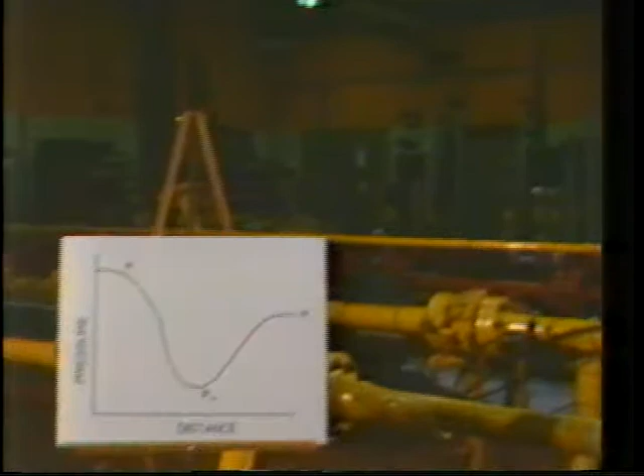Consider a simple restriction, such as an orifice plate in a pipe. Liquid passes through the restriction. Various forms of energy are exchanged in such a way that the mean pressure of the liquid decreases to some minimum value, usually referred to as the vena contracta pressure. As the fluid moves into the downstream pipe section, the pressure again increases, but is not fully restored to the value it had at the inlet.

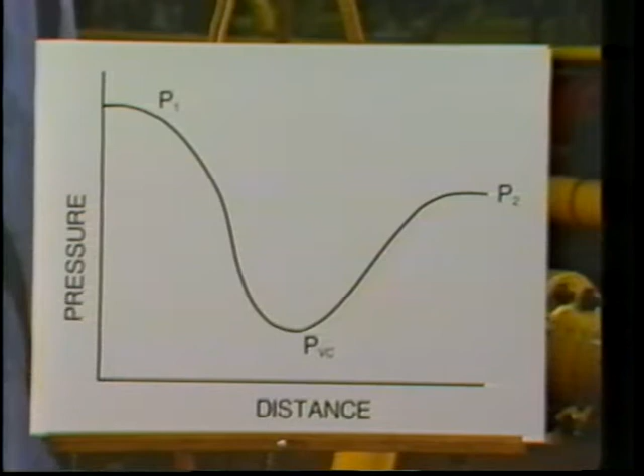This is because some of the energy was irreversibly lost through fluid friction. The key pressure is the vena contracta pressure. As long as this pressure is sufficiently high, the flow is free of cavitation.

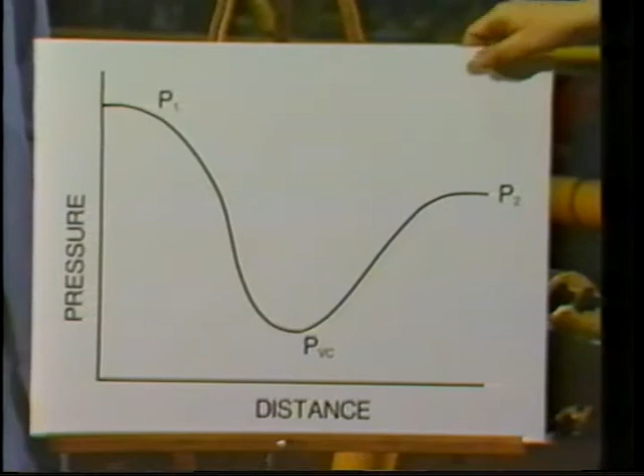If, however, this pressure should drop below the vapor pressure of the liquid, it becomes thermodynamically unstable and partially vaporizes. If, on pressure recovery, the local pressure rises above the vapor pressure, the vapor is again thermodynamically unstable and rapidly reverts to a liquid. This is the cavitation process.

Should the local pressure not recover sufficiently from the vena contracta pressure, but rather remain below the vapor pressure, the fluid will remain a vapor. This condition is known as flashing, as opposed to cavitation.

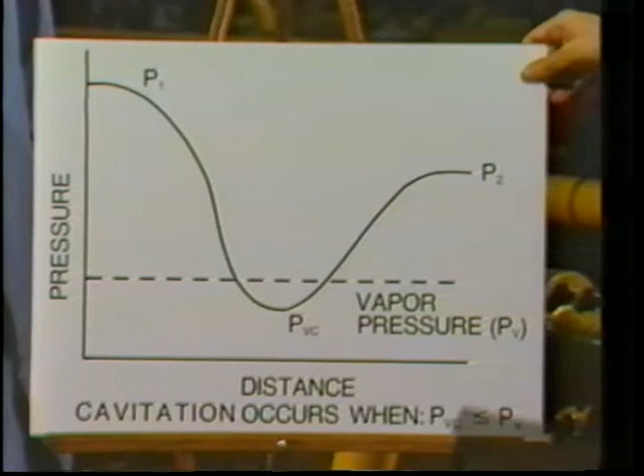A special valve installation has been prepared to allow us to actually see the cavitation occurring downstream of a control valve. Let me point out the main features to you.

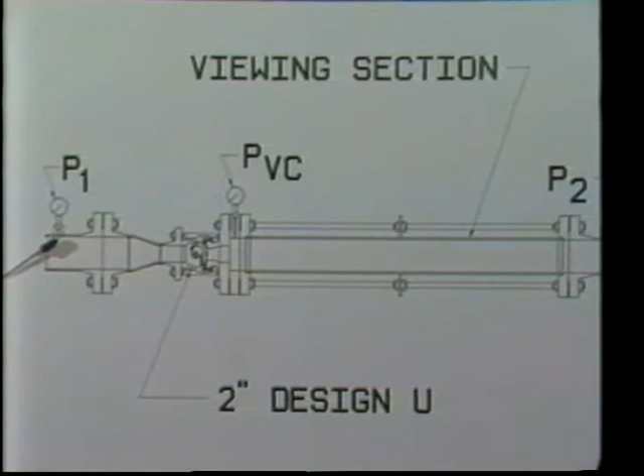A 2-inch Design U ball valve has been installed in a 4-inch Schedule 40 pipe. The ball is traveled at about two-thirds open and has been installed in the reverse position to afford a better view of the cavitation. The inlet pressure will be monitored by a computer at this position in the 4-inch pipe and is displayed on the computer screen during the demonstration.

Immediately downstream of the valve, a flange with a pressure tap has been installed. This position nearly coincides with the vena contracta position and will give a good indication of the minimum pressure in the flow stream. This pressure will be displayed alongside the inlet pressure so that we may compare the two values.

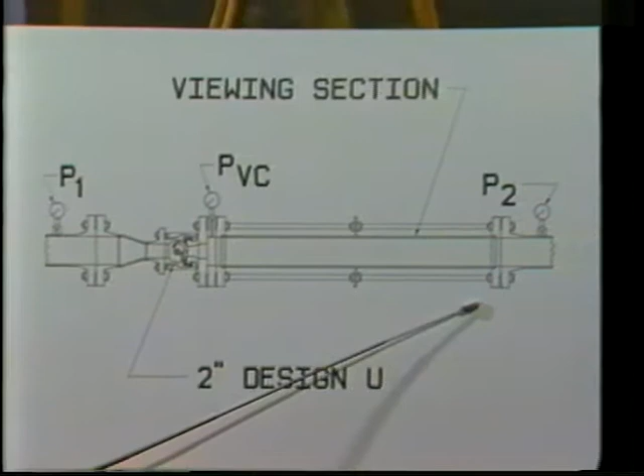The downstream pipe section is made of transparent plastic to enable us to see the flow stream, since it is in this region that vapor formation and cavity collapse take place.

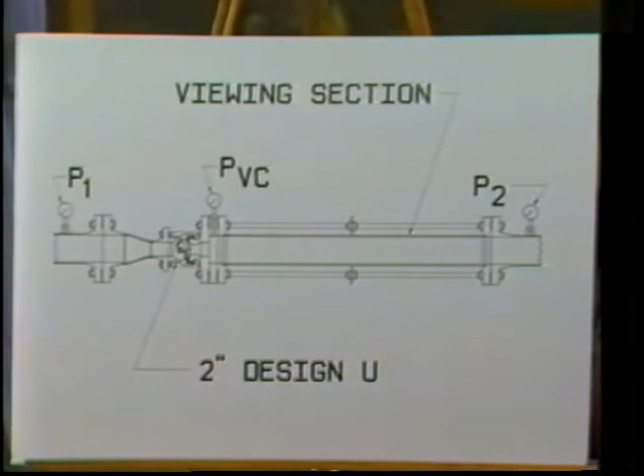Under normal flowing conditions, that is, no cavitation, the water will appear yellow in color as a result of the rust inhibitor additive. This does not affect cavitation, but in addition to protecting the system, makes the water more apparent. Cavitation will appear as a frothy mixture of liquid and vapor in this region.

Finally, the downstream pressure will be measured at this location and displayed on the computer screen along with the other pressures.

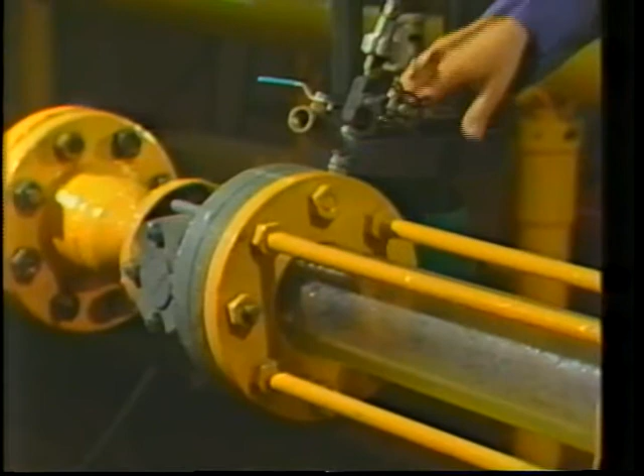Now let's take a look at the actual laboratory installation. We have the ball valve, the vena contracta pressure tap, and the downstream viewing section.

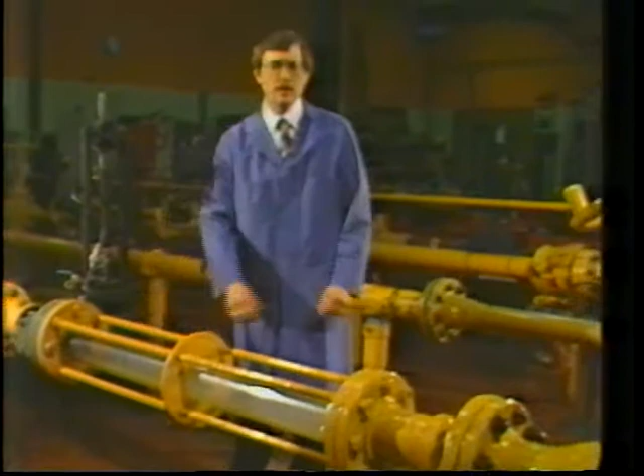During the demonstration, inlet pressures of 100 pounds per square inch gauge, 150 psig, and 200 psig will be maintained. I will control the back pressure on the test section, and consequently the pressure differential across the test section, with this downstream control valve.

There are four things to watch for as the demonstration proceeds.

First, notice the noise. This will probably be the first indication that cavitation is occurring. Cavitation noise has been described as sounding like gravel rattling around in the pipe, and many times is the only evidence that the liquid is cavitating.

Second, notice the vena contracta pressure. The laboratory test water has a vapor pressure of approximately 0.4 psi-A. Relative to our local atmospheric pressure, this results in a substantial vacuum between the environment and the vena contracta pressure. Also notice the large pressure drop taken from inlet to the vena contracta and the relatively short distance over which it occurs.

Third, take note of the physical location of cavity collapse. This is the critical region, since this is where the noise and vibrations are generated and the region most likely to experience cavitation damage. You'll notice it is a function of the back pressure on the test system and will move upstream and downstream according to changes in the back pressure.

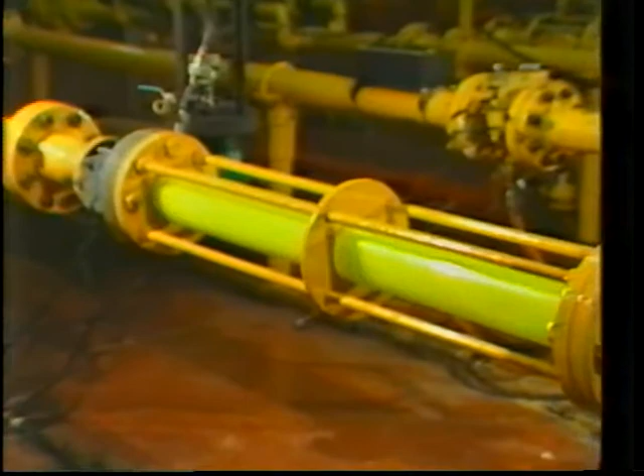The three key pressures will be displayed in the lower right-hand corner of the screen during the demonstration.

We're currently holding approximately a 35 psi drop across the valve and find no evidence of cavitation.

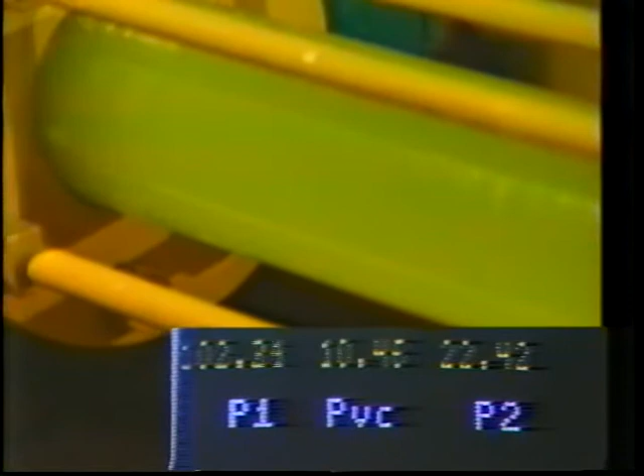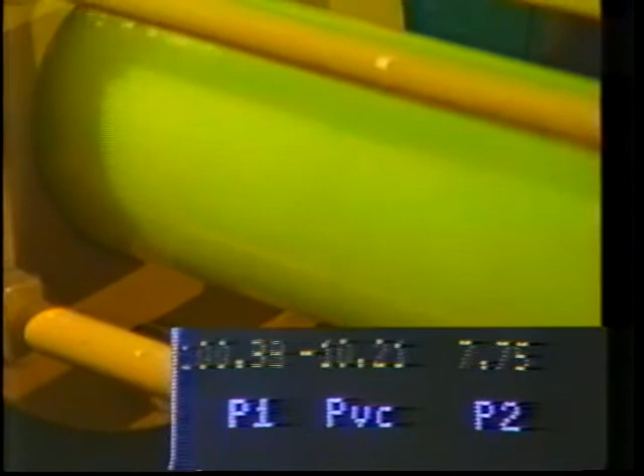However, as we increase the pressure drop to approximately 75 to 80 psi-D, a moderate level of cavitation exists. Notice the frothy appearance of the water just downstream of the valve. The sound pressure level under these conditions is approximately 100 dBA.

As I decrease the back pressure, the cavitation extends further downstream. Under these flow conditions, a strong vacuum exists at the vena contracta. This is evidenced by the indicated value of pressure as well as the suction present at the tap when I open this small valve to atmosphere.

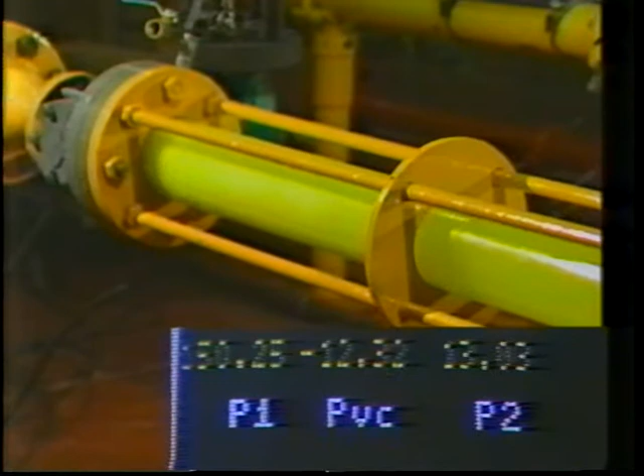Notice as the inlet pressure is increased from 100 to 150 psi-G and then to 200 psi-G that an increase in the level of noise and vibration is experienced. Under these flow conditions, the sound pressure level is about 108 dBA.

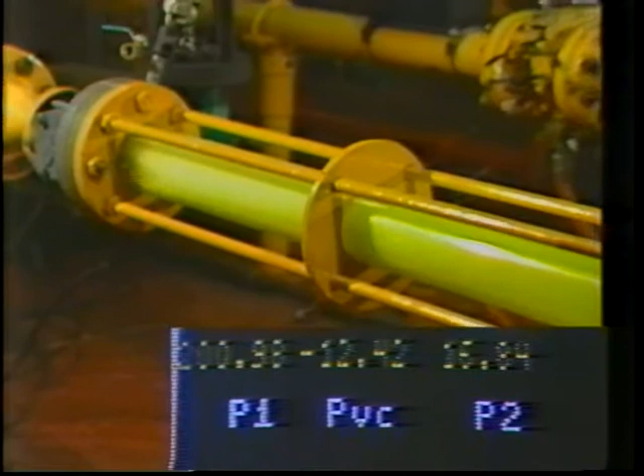Again, if I remove the back pressure, the fluid remains a mixture of vapor and liquid through the test section.

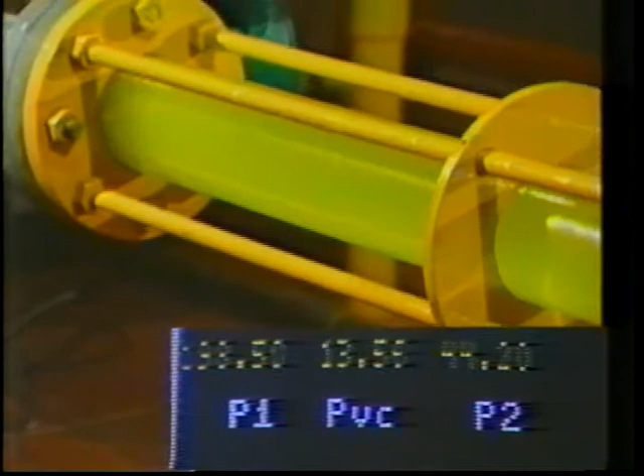We've again imposed a 70 to 80 psi-D pressure differential across the valve. However, at this higher inlet pressure of 200 psi-G, cavitation does not occur.

Now that we've had the opportunity to see and hear actual cavitation, let's take a closer look at a valve part actually damaged by cavitation.

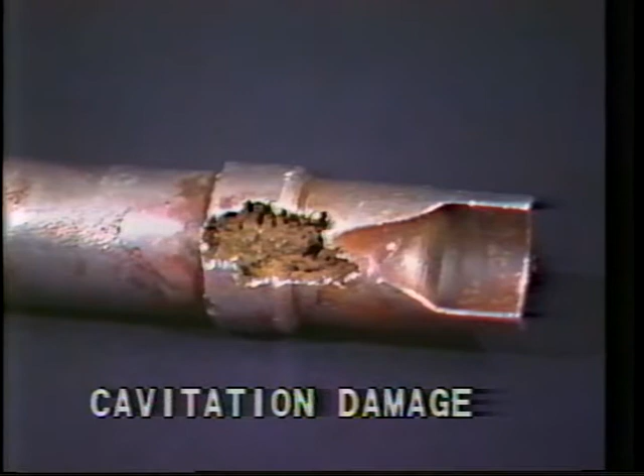Cavitation damage is caused by high-velocity microjets and shock waves which are set up when the cavities collapse. In order to be effective in producing damage, these cavities must collapse very close to the surface. This results in a very rough, pitted, cinder-like surface.

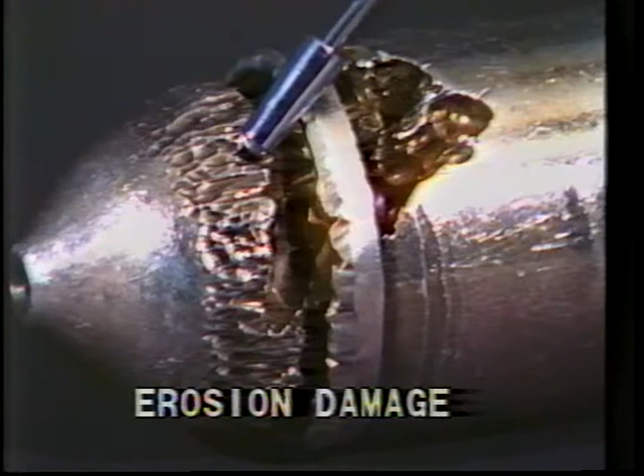Another type of damage which on occasion occurs in a control valve is that due to erosion. Erosion damage is typically very smooth and very polished, a stark contrast to the rough, cinder-like cavitation damage.

The final issue, and perhaps the most important, is how to control cavitation damage. Unfortunately, there is no simple, single answer to this question. There are a variety of methods and approaches to solving the problem. These can be grouped generally into three broad categories: 1, system design; 2, material selection; and 3, cavitation control products.

The most preferred approach is that of system design. We saw an example of this during the demonstration. We imposed an 80-pound differential across the test section with an inlet pressure of 100 pounds per square inch gauge. Under these conditions, there was a moderate level of cavitation in the downstream pipe section. When we imposed the same pressure differential, and hence the same flow rate through the valve, at the higher inlet pressure, there was no evidence of cavitation.

We've seen that cavitation is a liquid phenomenon associated with phase changes and liquid pressure changes. Cavitation can produce unwanted noise, vibration, and material damage. It's a function of the service conditions, and understanding these can help in controlling and effectively eliminating cavitation and its attendant side effects.